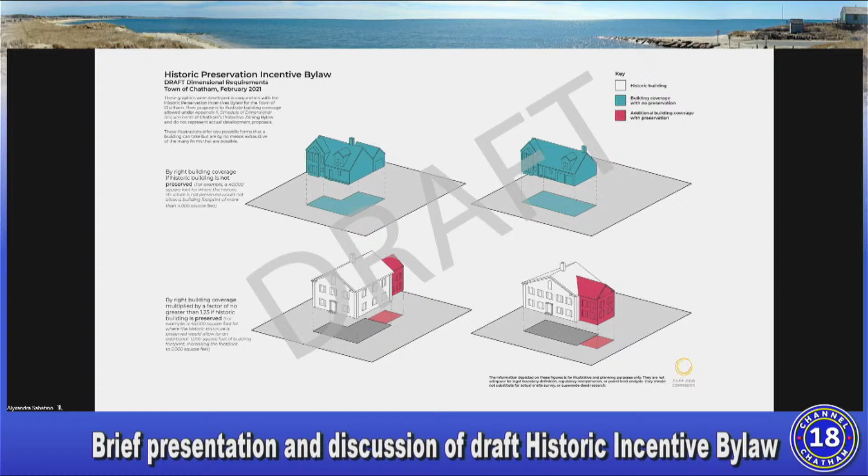I would think that we also might be concerned with the compatibility of the additions with respect to the historical structure - how they relate to it, how they appear in relation to it. And I would think that the Historical Commission would probably help give us input on something like that. So that's another thought that just came to mind during the presentation.

The only other thing I would say is, Ally, I've been looking at the map you sent me, and that does identify many of the existing situations. I tried to look at it closely because I realized we have something that may be coming before us soon on a property that is in the floodplain and does have a historic structure on it. That one doesn't appear as red on the map, which of course it wouldn't, but when you get into some locations, it's percentage of buildable upland. So there might be some minor issues, but by and large, it looks like the map is pretty good as far as identifying things.

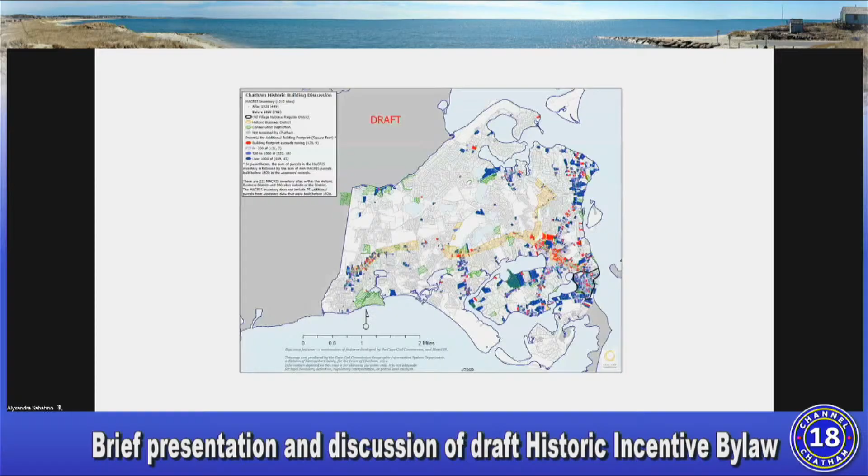Very good. Okay. So, Sarah, let me go on with reading the procedure, and then we could go on to today's applications. So, for those that don't know, what happens is we ask that all citizens and non board members participating in the call via the phone give us your name, please, and the last 4 digits of your phone number for identification purposes. The hearing notice will be read by Sarah B. Clark. Sarah is the PPO, Principal Permitting Officer for the town of Chatham. She's also our Executive Secretary.

Following that, after the hearing notice is read, either the individual or a representative will present the application or the appeal to the board. Then we would ask for anybody in the audience who wishes to speak in favor of it to do so. I would then read any and all letters that we had received regarding the application. We would then ask for anybody who wishes to speak against the appeal or has a question to do so. You do this, as well as those who want to speak in favor, by indicating on the screen so that Sarah can see you and include you into the meeting, and we can listen to what you have to say. If there are folks who speak against or raise a question, then there could very well be some rebuttal. We would then have the board members ask questions, and following that, we would close the public hearing and go into deliberation, where we would hopefully end up voting.

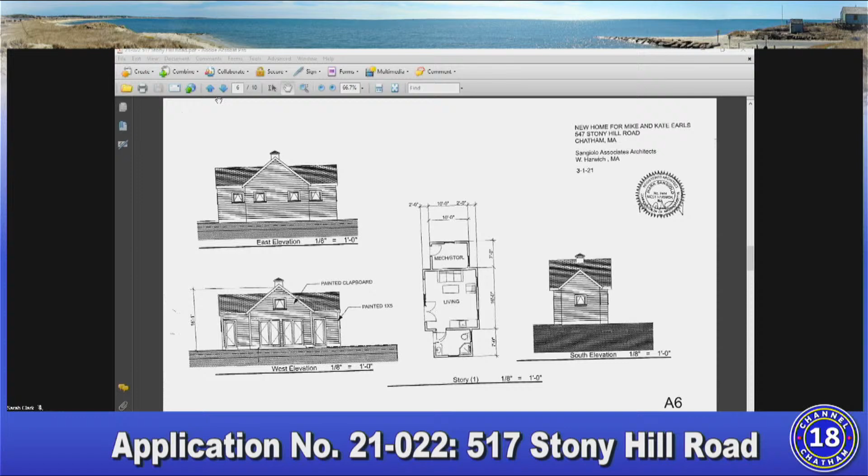These are rough copies, but you get an idea of the massing. What we're trying to do is scale the house down and offer some material variation. We were thinking of the two gable parts of the house being cedar shingle, and the middle part being white clapboard. I think it'll create a nice contrast and be very appropriate with the materials in the rest of the town.

How about the next one? And that's really it for the design. Okay, thank you very much.

You're welcome. Next up, Mr. Riley, how about the lady, the landscape lady? Sure, Jen Crawford. Is Jen with us? I don't see Jen. Okay.

All right, let me explain what we did. We've been to the Conservation Commission, and their concern was that there be no building inside the 0 to 50. If Sarah would put her cursor up on the north side, all that planting between the old cranberry bog and the 50 is planted with native plants. Right now the property's overrun with plants that are invasive, or lawn area, which is bad for the Conservation Commission. So we've removed all that.

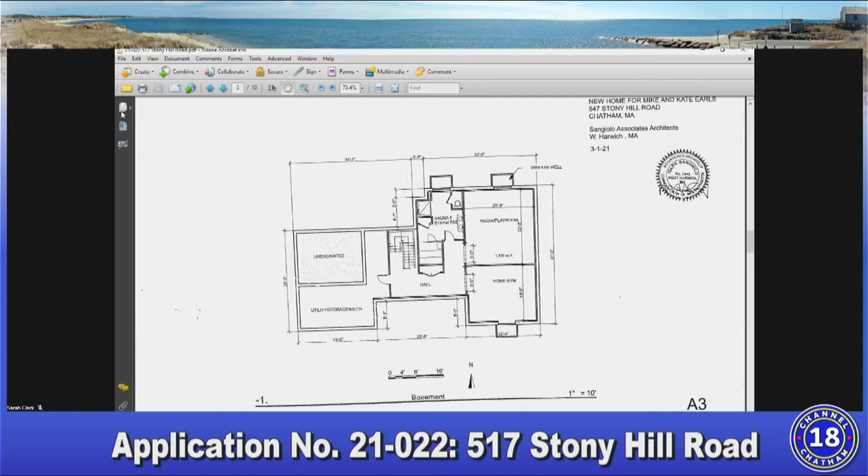It depends what you consider the neighborhood. As I indicated, the house across the street, Joe Nick's old house, is significantly smaller. Steve Nick built a brand new house on the corner of Stony Hill and Old Harbor that is substantially larger than this building. And if you go down Old Harbor Road a couple lots, there's a brand new monster, double gambrel roof, facing the street, that didn't need zoning board of appeals approval.

As you go down Scatteree, to the east from the property, you've got a couple of homes that would be substantial but smaller than this property, and then a couple of new homes that were built, one by Eastwood companies, that are again significantly larger than this structure. If you go up the road towards Route 28, it's an old neighborhood, and the houses tend to be smaller.

There have been some under construction now that will be larger, but I think rather than living area, what matters is the way the building presents itself to the street—we don't have a standard really for either. The compatibility of the size of the proposed structure with neighboring properties deals with the visual impact of the structure to the street. Although, thanks to Mark's abilities, they have been able to create a significant amount of living space inside the structure, I don't think the structure itself is incompatible with the neighboring properties where you have such a mix in this neighborhood.

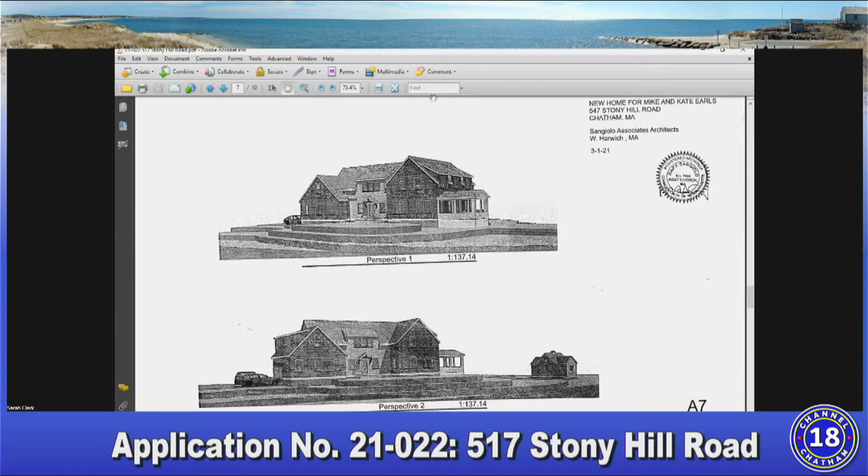Okay, if you can just stop sharing, I will go ahead and share my screen. Can everyone see that? Yes. Okay, so the steps you're seeing are just the contours, not evened out—they're not retaining walls. That's just showing the different elevations as you drop down away from the house.

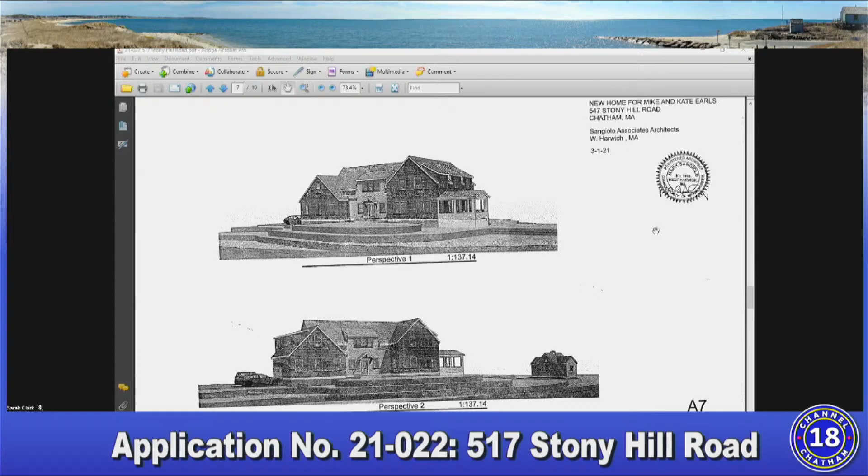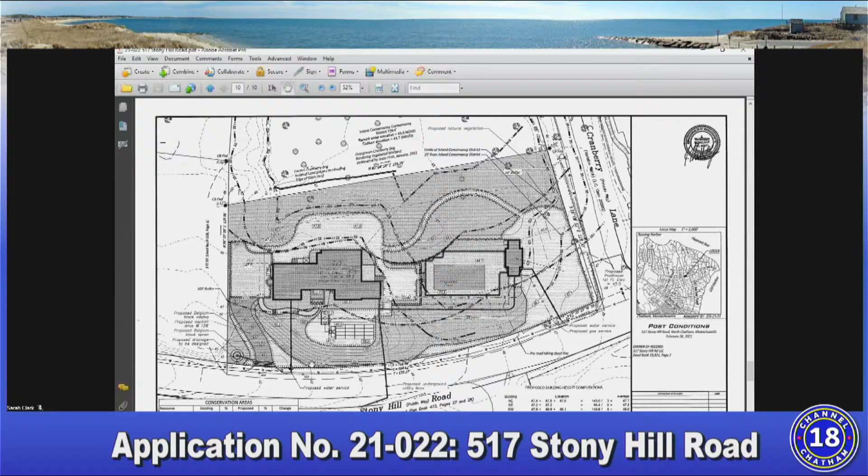That's correct. And how is that going to be landscaped? Well, if you look on the post-conditions plan—Sarah, yeah, there you go. You can see, Paul, if you move your cursor over the contour lines between the house and the street. There you go, see Paul, it goes from 43 up to 50 in 2-foot increments.

So it's just the way—they're evenly spaced contour lines, which means it'll be an even, smooth contour going up from the road to the house. They're 1-foot increments actually. Oh okay, sorry, thanks Thad. And how will that be—what will you be looking at, looking from the road up to the house? Well, we're gonna have a hedge at the street line. You'll be looking up, the entrance is recessed by about 10 feet between the two wings.

So you'll be looking up at that recessed entryway, and then the two gable ends—one of the garage/bedroom and one of the main living spaces.

So you see there's a spot elevation in the center of the recessed area, right there, 51. And if you come straight down to the street, you see 41.9. So if you're standing in the street, the front door is going to be 10 feet above you, but it'll be behind—it's over 52 feet away. In fact, the front door is about 60 feet away.

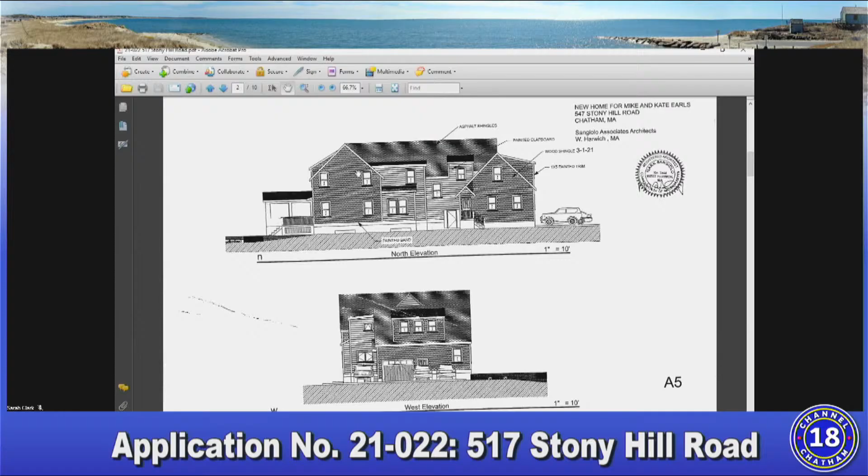And if we go to A1 of the architect's plans, ignoring the porch, the frontal face from the garage on the left, or the bumpers of the car, over to the patio or covered porch, that looks like it's 70 feet. Is that in agreement there with either Mark or Thad? I'm sorry, 70 feet of horizontal distance? Correct.

Yeah, something like that—23 plus 25 plus 22. Okay, and I guess I just wanted to make sure of that, because I think it's paralleling some of the questions that Paul asked. There's some concerns about the size, and I wanted to make sure I had the math right. Thank you, that's it. This was all lawn, and there were going to be pockets of shrubs and trees.

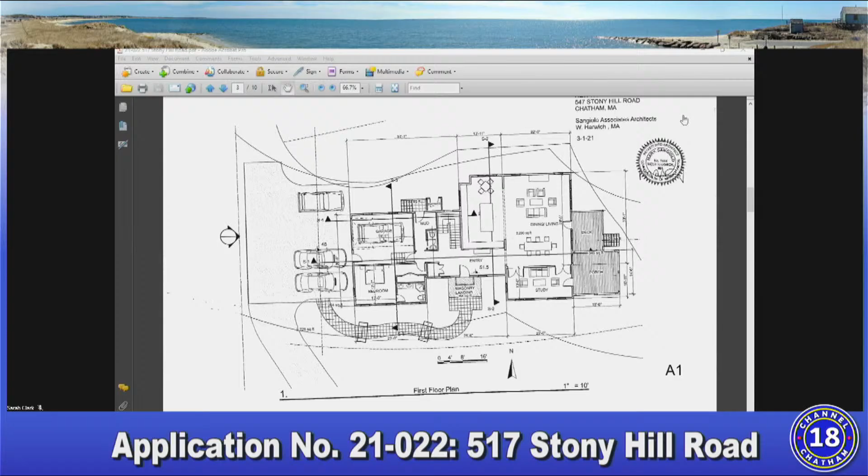Okay, questions from Dave Thompson. Thank you, Mr. Chairman, I don't have any questions for these gentlemen. I will save my comments for a little bit later.

Okay, thank you, Dennis. Yeah, this is Dennis Sullivan. I just had a couple of questions, Bill.

I had some reservations about the mass of the house, but the pool looks like it's essentially at street height level, but obviously it's closer to the street than the house. And I was wondering, how are you going to mask the pool from the street? Is it a hedge there? Is there a wall there? There's going to be a hedge that goes along the front of the building, the front of the property.

In front of the pool? Yeah. And if I may, if Sarah could bring up the site plan again, the third sheet of it—so you'll see that there are different shades here, the lighter being lawn area, and the moderate shade being vegetation landscaping. So the proposal is to landscape between the house and the road, between the pool and the road. Over on the east, there would be some lawn around the building itself.

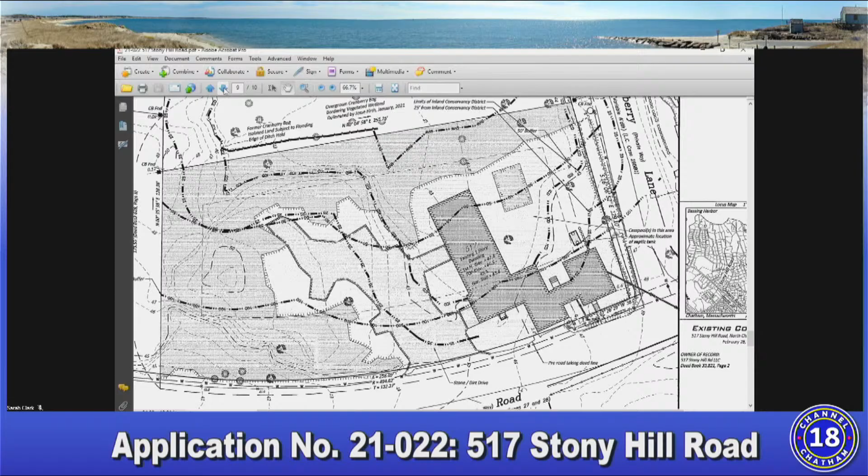Okay. Also, can you put the site plan back up? Thanks. And slide it up so we can see the road. All right. Great.

You talked a little bit of drainage. What exactly is that structure to be designed that's supposed to catch stormwater from the driveway? I think I misspoke earlier. I said a trench drain, and that's one option that could go in, but a small catch basin off the side of the driveway, and everything could be pitched to that, and then a 6x6 pit.

There'd be excavation here as well to make sure we're down to clean material, just like every other structure. Can you just explain what you're showing there with it? It looks like, is that an inlet then, or just like a sump pit of some kind? What exactly is your thoughts for that? Because that is going to catch a lot of water.

All in all, it's a fairly small area. We have a driveway that's 50 feet long and 14 feet wide. The idea was to put in a catch basin to catch that water, then going over a 6x6 pit - that's what they use for road construction. It's a fairly substantial drainage structure.

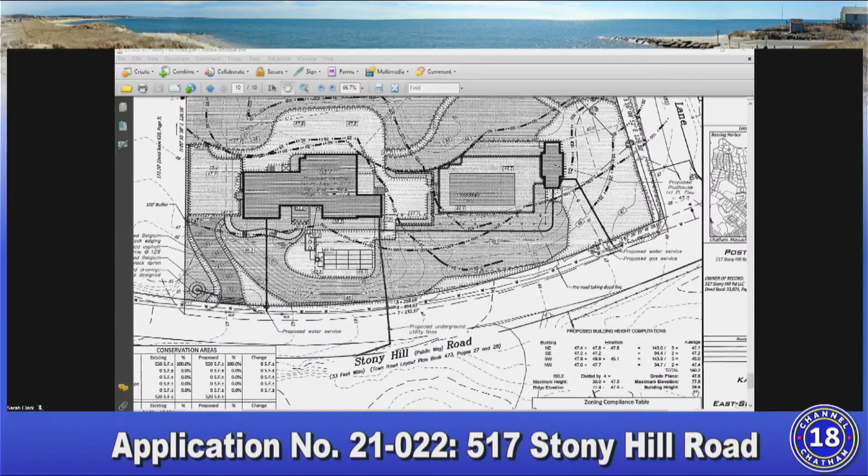And so, considering what I would suggest, even though they've been able to stick a lot of living space in the building, it's really a pretty modest building compared to Steve Nickerson's building around the corner, or the new building that just got built down there.

So I appreciate the fascination with living area, but that's never been part of the zoning bylaw. I understand the board is concerned about the visual impact of changes in the neighborhood. But considering what's on the site today, loaded with invasives, the over 10,000 square feet of invasive removal and mitigation plantings we're doing, right now the building's 1.4 feet from the street, and now it's going to be 52 feet from the street.

I really think this is a structure that is not substantially more detrimental to the neighborhood, and the mass is appropriate because it's broken up by Mark's design. So that'd be our final presentation.

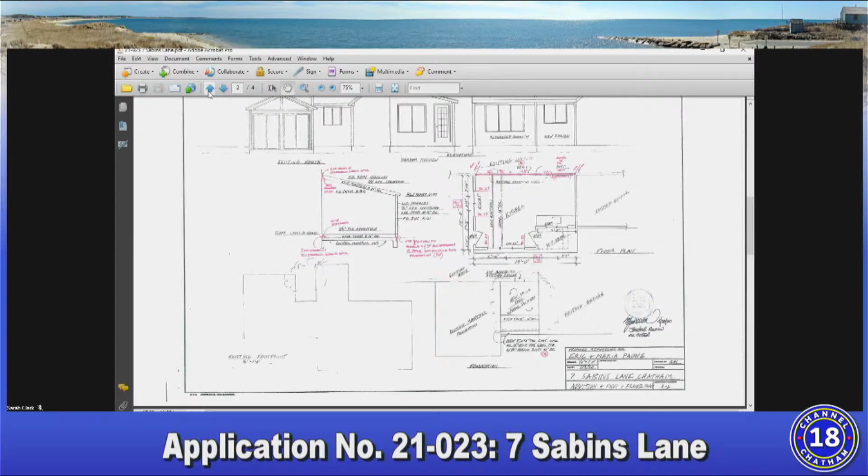Thank you, everybody. What we are proposing is to replace the old sunroom on the back of our house, and remove the existing wall between the sunroom and the kitchen to make it part of the new kitchen we're adding. So we want to take that section down and bump it out no further. We're going to use the old foundation there and fill in the spot that had an old dilapidated deck about 7 feet off to the right side of it. That's what we're looking to do, hopefully.

Okay, you have the criteria. Could you please go through it for us?

On the back side, the existing part right now is the sunroom. What we're looking to do is make it 14 feet by 19 feet, and it will become a whole new kitchen. It will have 2 separate doors on either side of the room, surrounded by 3 remodeled new windows on the back and 2 in the kitchen. It should be fairly simple, with a new roof configuration.

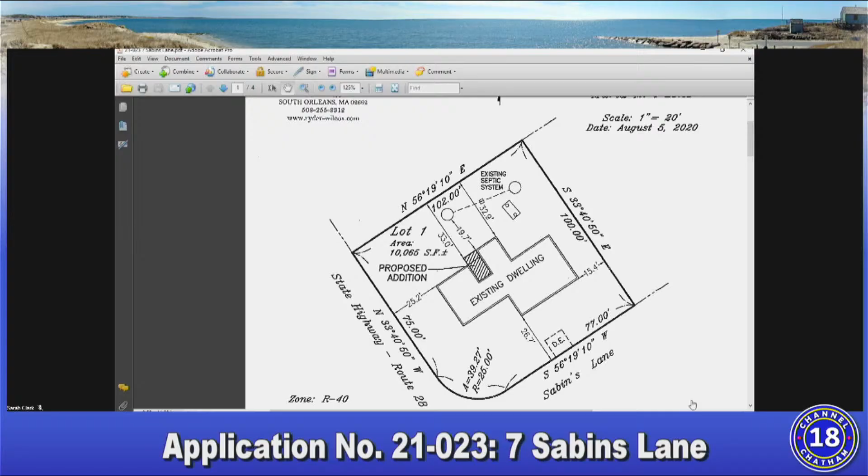Okay, the criteria I'm talking about are the 12 items that we use. I believe Sarah gave you the list. It starts out with adequacy of the size of the site, compatibility, and so forth. I'm trying to see here - I unfortunately do not have that with me in front of me. I did not receive that, I don't believe. Well, you probably did, but that's okay. Sarah, can you put that on the screen so Eric can see it? I'm unable to see it because I am on the phone, we were not able to get through on the computer. Okay.

All right, then I will just quickly redo the ones you need to respond to. So the first one is tell us the adequacy of the size of the site. Now, I don't think we need to have that - it's a one-family home and all that.

Compatibility of the size of the proposed structure with the neighboring properties - tell us about the rest of the neighborhood. So around me, we're basically right here on Sabins Lane. It's a small quarter acre, and pretty much all the other homes in the area are a little bigger than ours. Ours is a smaller area, and it's just a two-story simple home.

Okay, I don't think we have to worry about the extent of the proposed increase in nonconforming nature. Tell us about the suitability of the site, including but not limited to the impact on neighboring properties, on the natural environment, including slopes, vegetation, wetlands, groundwater, water bodies, and storm water runoff - if you listened to the previous application, there was a lot of discussion about that. Yes. According to what I see, really nothing is changing. The surrounding landscapes are all staying the same. The only thing changing is the configuration of the roof line coming off the back side of the house.

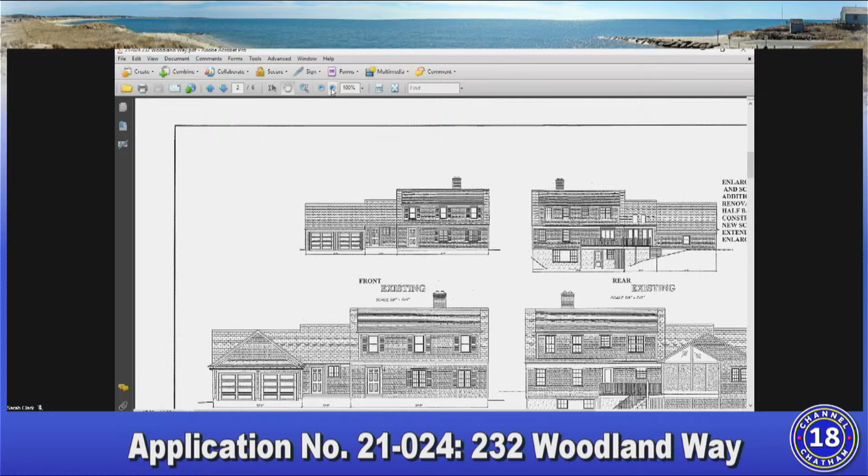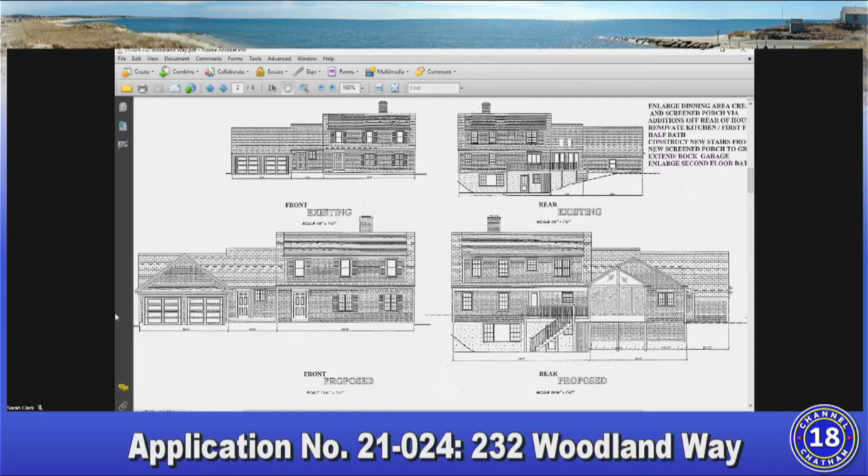They propose, as shown on the left-hand side there, basically an architectural feature which will overhang the front of the garage. Some of the garage will be extended as well. We're seeking a 122 square foot addition to the garage, and we need your approval because the house was built mid-60s, 1966, when zoning out there was R20, and we are a little bit too close to the lot line now. We want to get a little bit closer, 1/10 of a foot, which in English is about an inch. So I'll go into the criteria.

There's a half-acre site, which is adequate, certainly for the existing home, notwithstanding the proximity to the sideline. If you approve the special permit, you can do so based on the finding that the site is adequate for the 122 square foot addition to the garage we're seeking.

As to compatibility of size, all of the lots in the neighborhood were created in the 1950s under old R20 zoning, and all of them on the landward side, our side, are now non-conforming. The house is comparable to the others in the neighborhood. I handed out a comparison chart. We're currently at 7.9% coverage, we'll go to 8.3%, but the house itself isn't going to be changed significantly.

It will remain compatible. The relief sought is, as you know from having been out there, a long way from the street—nearly 60 feet back. As to the extent of increase in nonconformity, it's again 1/10 of a foot. We're going from 24.4 existing to 24.3, and that's just because the garage isn't squarely sited on the lot. There are no environmental issues, so there's no question about suitability of site.

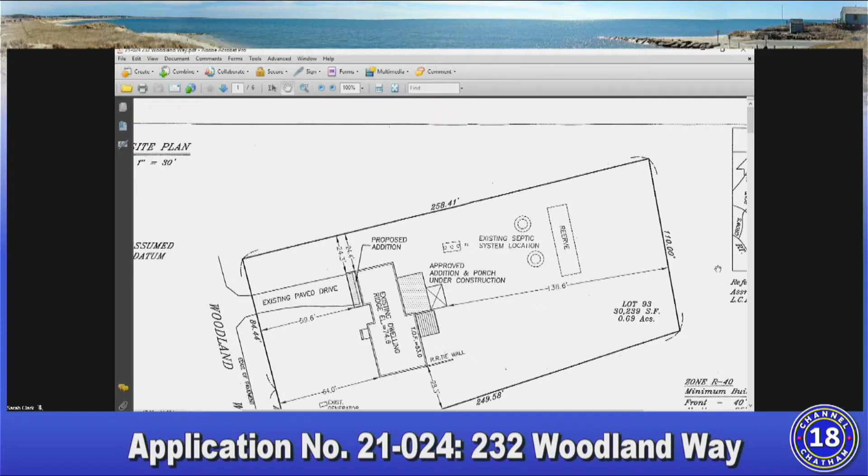So the question before you is whether this proposed small addition to the garage, set way back from the street, is substantially more detrimental to the neighborhood than the current non-conforming structure. The addition, even with the space at the rear, will comply as to coverage. It's a minimal change, and I think you can find that it is not substantially more detrimental. Happy to answer any questions.

Thank you very much. Is there anyone in the audience who wishes to speak in favor of this? If so, please indicate on the screen so that Sarah can recognize you. I see no one that wishes to speak in favor of the application.

Okay, I'll read the correspondence. This consists of a memo from Judith Giorgio. She writes, dated 4/20, I've reviewed the plan to renovate. Proposed planned addition does not increase septic flow. The location of the addition does not encroach on the existing septic system. The plan is acceptable as proposed.

Is there anyone in the audience who wishes to speak either against or has a specific question on this application? If so, please indicate on the screen now so that Sarah can recognize you. I see no one that wishes to speak in opposition or has a specific question.

Okay, then we have questions on the board. Megan—sorry, muted—I have no questions on this, I think it's a good project. Bill, no questions at all. Dave Veach has no questions. Paul has no questions. Buck has no questions. Dave Thompson has no questions, sir. Dennis Sullivan, no questions. All right, now I have no questions.

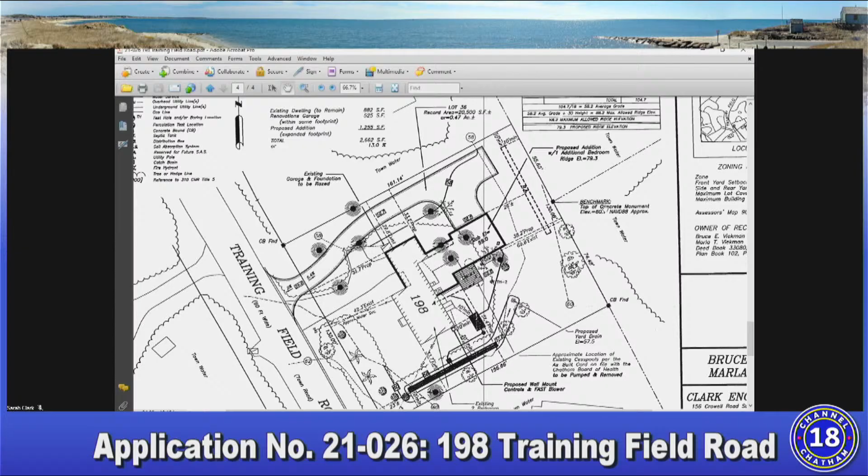Because it meets all of the setbacks, and some of them quite well, you can see to the east it'll be more than 38 feet distant, and more than 50 feet distant to the south, and will be barely visible from the street. Because the garage addition is taller by about 4.5 feet, from the road near the training field, the very peak of the garage will be visible, but otherwise the proposed addition will be hidden from the road.

As to compatibility with neighboring properties in terms of scale, siting, and mass, if we focus on the square footage of the project as proposed, it will only cover 13% of the lot, which is under the 15% that is allowed as a matter of right.

If any of you have driven through the neighborhood, you'll see there are many changes going on, all involving people improving their properties. At this point, this property could benefit from just such an improvement. It will not affect any of the neighbors because there are no roads that will have to be accessed to get to the properties. It's being built pretty much in the center of the lot, and will be in keeping with the neighborhood as it's changing.

Obviously, the house is larger, reflecting much of what we all experience: larger kitchens, larger bathrooms, larger garages. All of those, of course, have changed since 1971. Finally, as to the adequacy of the utilities to meet the needs of these owners without detriment to neighboring owners — since the lot is on a public road, there are certainly adequate utilities.

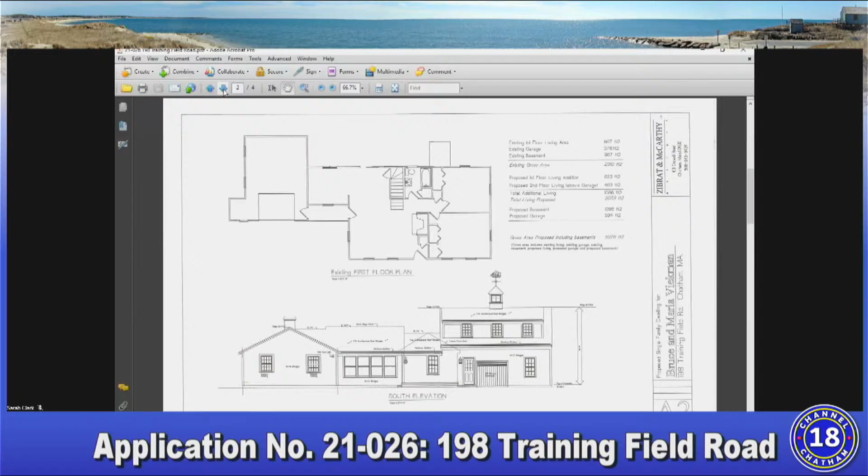Changes to the floor plan must be made prior to approval by the Health Division. So in other words, she does not think what you want to do is appropriate. No, I understand, her letter is clear. And so I would have to go back to my client before any building permit is issued, or I think the health permit is already issued, frankly. And so that's why I'm a little bit surprised by the letter. But clearly, if the Board of Health requires that one of the existing bedrooms be removed, there are 2 in the existing home. And of course, the master bedroom, in where the garage is presently, would be a 3rd bedroom. And then if the bonus room, which is a very strange term, is going to be considered a bedroom, then obviously there's 4 bedrooms in that house, and 1 would have to be eliminated.

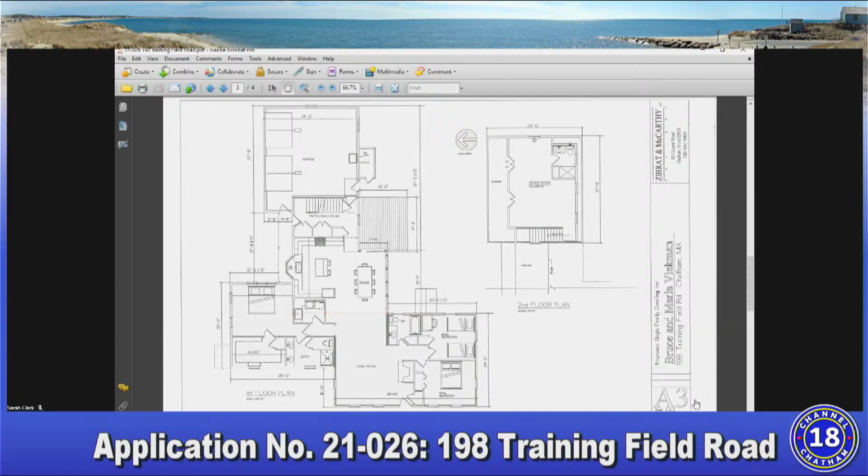I guess I would ask if the ZBA can approve the plan based not so much on the floor plans, because I don't think the ZBA ever approves floor plans, but based on the increased footprint of the structure and its setting on the lot, and withhold any approval relative to number of bedrooms. That's the best the applicant can ask for at this time. Yeah, and incidentally, even if we approve it, you're not going to get the green light unless the Board of Health does. So I think you're right about the bonus room.

And that is a term, I think it was invented by Mr. Riley and Mr. Marsh, if I'm not mistaken. So, because I like to use that term all the time. Anyway, so maybe if we could possibly approve this, but making sure that the bonus room was not a garage -- the bonus room would not be a bedroom -- would be part of our conditioning, and that might satisfy you and them and everybody else. So I guess we'll go forward with that.

Okay, so let's go into deliberations, Paul. This is Paul Semple. I'll move to close the hearing and move into deliberations. Dave Veach seconds.

Okay, we need to vote on that. Dave Veach votes yes. Paul votes yes. Buck votes yes. Dave Thompson votes yes. And myself. Okay, deliberations.

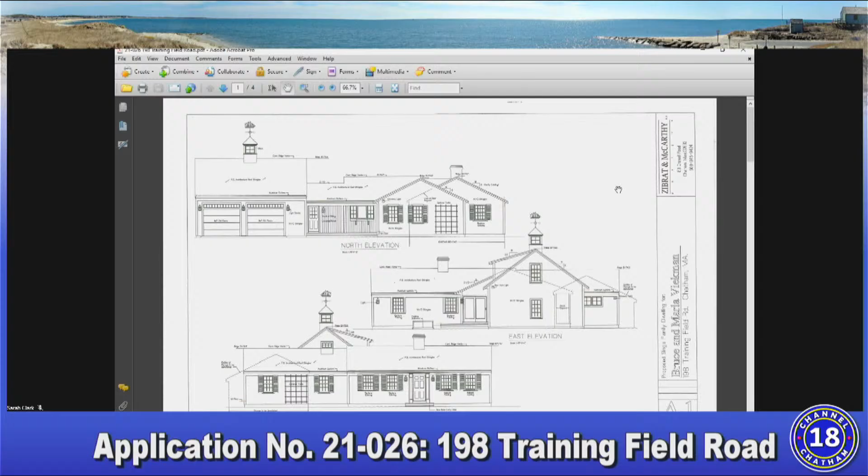Oh my God. I'm horrified, I'm horrified. Well, thank you very much, Mr. Thompson. Oh my goodness, okay. All right, so thank you, Dennis. Yeah, I also picked that up when Peter said you were going to see the peak of the garage, you were also going to see the cupola. But I figured our chairman would have seen that, but apparently he didn't. If I were voting, I certainly would vote in favor of it. I was sound asleep. All right, Megan.

I would also vote in favor of it, provided it's not a glowing light in the cupola. Yeah, no, there are 4 different colors up there depending on the time of day. Light show. It's like the John Hancock building, flashes red when it's going to snow, and all that kind of stuff. Bill.

Maybe another solution is, a thought when they go to the Board of Health — they didn't even show on the plan where the new septic system is going to be on the site, that I could find. But maybe they just didn't do enough testing to get a 4-bedroom home approved instead of a 3. That might be a way of not having to deal with the bonus room. I don't know, just throwing it out there. But other than that, I would certainly support this. Yeah, it's probably more of a design issue, how old the system is, something like that.

Dave Veach: Yeah, well, it certainly meets all of our criteria. And I think, assuming we approve, which I certainly am going to vote for, there are probably ways they can address it within the building as shown — they might be able to open up to the garage or something. I'm not sure, but I don't think we need to condition on that room, because they're going to need to meet the requirements of the Board of Health one way or the other. I don't think we even need to weigh in on it, really. So that's my two cents, but it's a nice project and I will approve it.

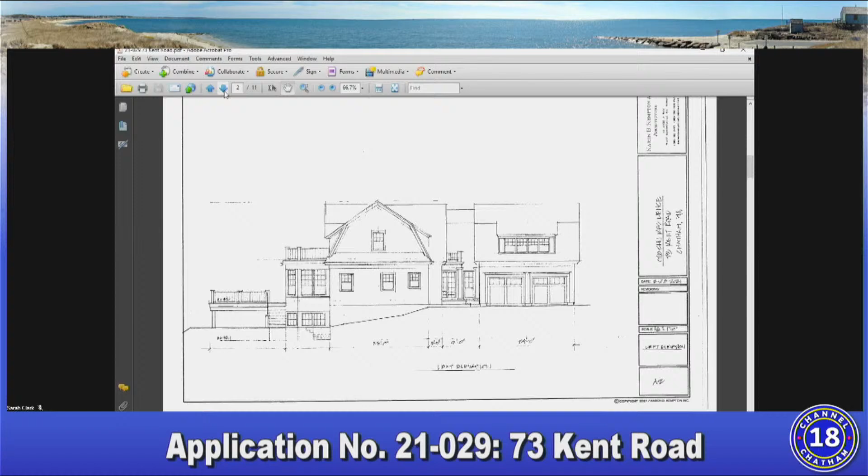Even on the rear elevation, there is no full walkout, with the grade meeting the windowsill and exposing only 5 feet of the basement wall rather than a full 10 feet. This helps to diminish the scale of the house by using the existing contours.

So by using the length of the house, the existing footprint, we are adding a second floor, and all bedrooms face the water, which was a key factor for the clients. The screen porch on the north side of the house has a second floor balcony rather than an extension of the second floor, so this adds a nice bookend to the house and softens the structure.

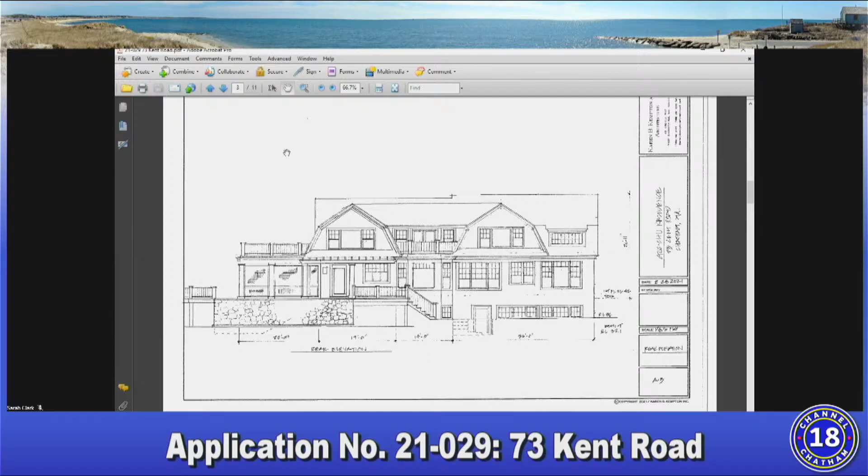If we go back to the planting plan, we hope that you agree that this house is not detrimental to the neighborhood or the property, as the footprint of the existing structure and the footprint of the new house are similar in size, 2933 square feet to 2990 square feet, which is a 57 square foot increase.

And although there's a minimal change to coverage, 10.2 to 10.4%, we are still under the allowed coverage. Additionally, we feel the proposed size of the structure on the actual lot size of 43,500 square feet, or 6.8% coverage, is visually in scale for the property. The new house conforms to all the sideline setbacks and is 86 feet back from Kent Road.

As mentioned before, we think this proposal has a net benefit to the property, shown by the removal of invasive species and the addition of mitigation plantings as shown on Teresa's plan. So we hope that you agree that this is an attractive addition to the neighborhood and a positive impact to the existing property. And that's my presentation.

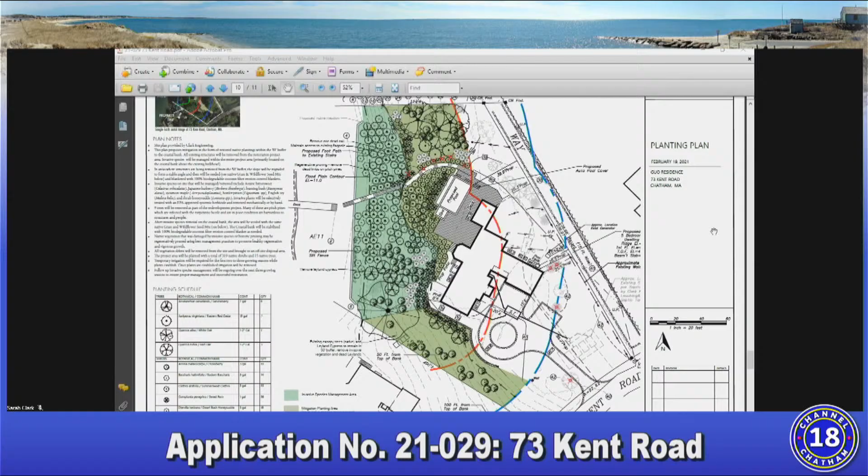Thank you very much, Karen. Excellent presentation as always. Oh yes, that's right, although I missed the virtual trip around the house. Anyway, so yes, you have anything else to add to that, Mr. Riley, or no?

Just one thing, if Sarah would show the plan that's got shaded in red, the original. So the one thing I want to point out is, we talk about the pool and the patio being 3 feet from the top of the bank. Actually, the top of the bank before the pool was up above the pool, and the property owner, I think in 1980, dug out that area so they could put a pool there. So one of the benefits here is the restoration of the grading of the original bank. I just want to point that out.

Yeah, no, and that was, when I went to the back of the house and looked down, I thought, what is going on here? So thank you for pointing that out.

Okay, so I would ask, is there anybody in the audience out there that would like to speak in favor of this? If so, please indicate on the screen so that Sarah can recognize you.

Dave, you don't want me to go through my lengthy zoning bylaw analysis? No, thank you very much, Karen did a great job. Mr. Riley, you can email that to me so I have a copy of it for the file. There you go, thank you. There you go, the benefits of being at 7 o'clock. That helps, and she did a great job. Make sure you increase her fee.

Absolutely. All right, so anyway, anybody out there want to speak in favor of this project? I do not see anyone that wishes to speak in favor of this application.

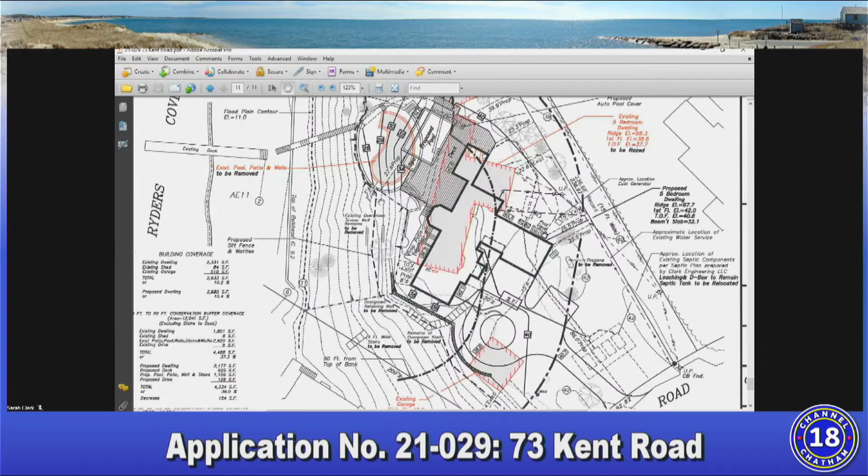Okay, very good. So Paul, a motion please. Yeah, this is Paul Semple, I'll move to close the hearing and move into deliberations. Dave Veach seconds. Okay, we need to vote on that. Dave Veach? Veach votes yes. Paul? Semple votes yes. Buck? Buck votes yes. Dave Thompson? Dave Thompson, yes. Okay, and I vote yes.

So, deliberations, let's start with Dennis. If I were voting, I certainly would vote in favor of it. I think it's a great environmental project, and I think it's a great zoning board project. It meets all our criteria, and as I said, if I were voting, I would vote in favor of it.

Megan? Sorry, there was a little crash at home. All right.

Okay, I too would vote for it. I definitely think it's a nice project. I think it's an improvement from an environmental standpoint, and I like the project, especially located where it is.

Bill. Yeah, I would agree. I think it is a major improvement, especially with the supplemental plan with the plantings and other landscaping that they're going to do. I think Buck's concern about that corner is very valid and maybe needs to be addressed in the construction phase, to get that wall in place sooner rather than later. I also think that some consideration should be given to the neighbor here, with the timing and protecting them from what appears to have been other disruption to their driveway from the construction of their home. But I would certainly support this as well.